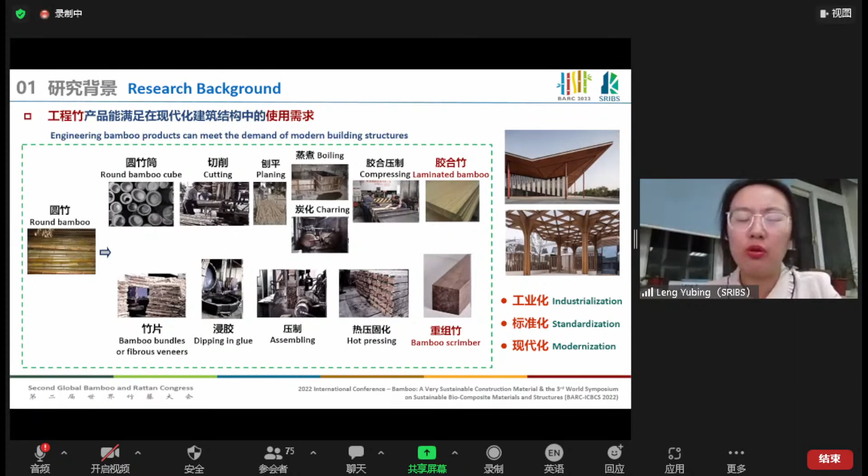Round bamboo has the longest use history around the world, not only used in small buildings and civic buildings, but also large-scale exhibition halls and pavilions. As early as the 1950s and 1960s, we started research on using round bamboo in buildings. Engineered bamboo products actually use modernized processes to produce low carbon, modernized, standardized products. So while keeping the good nature and features of bamboo species, it can also reach standardization and industrialization.

Status quo of engineered bamboos: first, we are lacking technical standards. From designing, construction, maintenance, and inspection, there are a lack of relevant standards. As a result, there are hindrances and obstacles for bamboo materials to be used in construction. You always need a feasibility study before you can largely use bamboo as a building material, so it can only be used for pilot projects, which limits the application.

Durability and fire performance are also key factors limiting the dissemination and application of bamboo materials. Against this background, we believe we need to come up with engineered bamboo standards. Only with available standards can we largely apply these to the building sector.

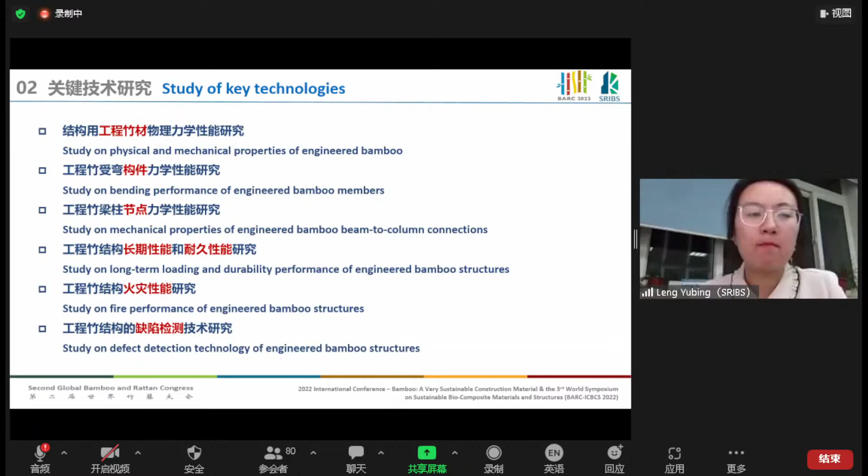So focusing on the materials and the mechanical aspects, beam to column connections, durability, fire performance, and detection technologies for defects, and so on and so forth.

First, if we are going to use engineered bamboos as a building material, we need to have a better understanding of the tension, compression, bending, and shear properties of engineered bamboos. This is the fundamental justification and basis.

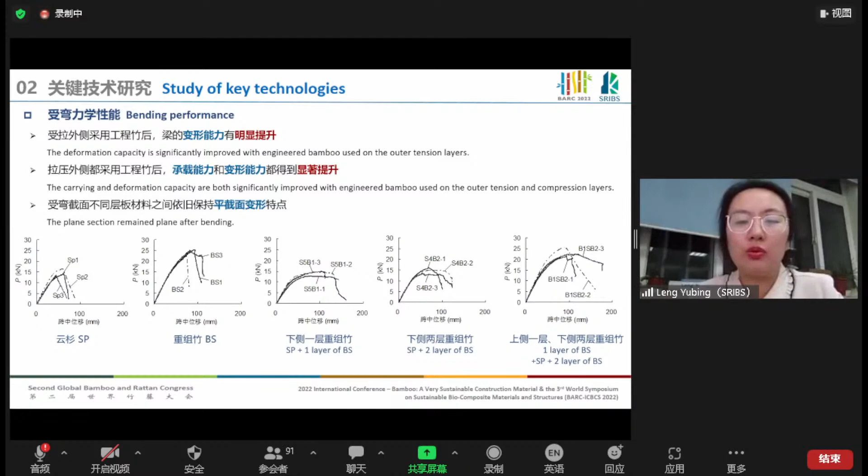We also studied the bending performance of engineered bamboo members, including specimens with a combination of fast-growing timber species in the middle, such as spruce, in the middle layer. Through this laminated and bamboo scrimber test, we found that if we use fast-growing timber species in the middle, with engineered bamboos on both sides, the deformation capability is significantly improved. Based on these testing results, we use the flexural capabilities and calculate the layered superposition, equilibrium condition, and deformation compatibility conditions, and so on.

We also study the mechanical properties of beam to column connections. We selected laminated bamboo and bamboo scrimber to understand their mechanical properties and connection methods, and to optimize the connection, we consider the mechanical features and processing method.

We selected four connection modalities. The first is bolted connections with slotted-in steel plates. This is a very simple structure, but the downside is it's not strong enough, and at the bolting connection point, it's very easy to crack, so it has a cracking problem.

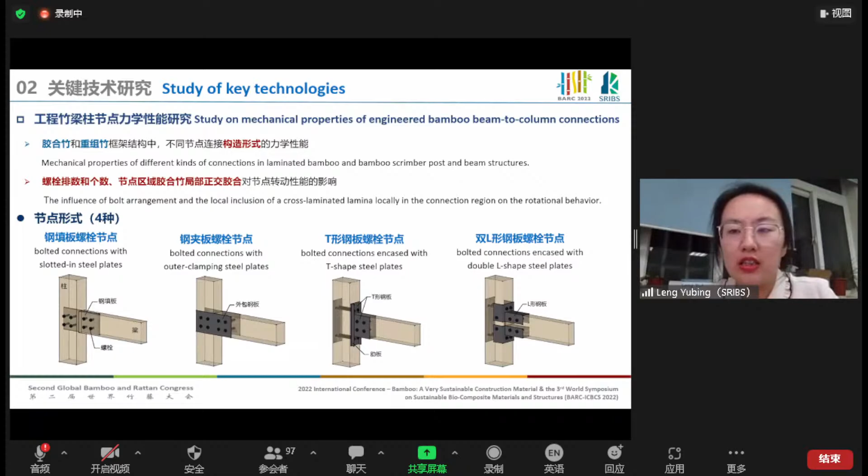In order to improve the situation, we came up with case 3 and 4. One is T-shaped steel plates, the other is double L-shaped steel plates. The latter would consume more steel, but the affordability of the cost is still very good. So we had these four types of tests.

For the mechanical feature, sometimes it's difficult to resolve the flexural loads and cracking problems, but still, with improvement, we can improve the bending performance.

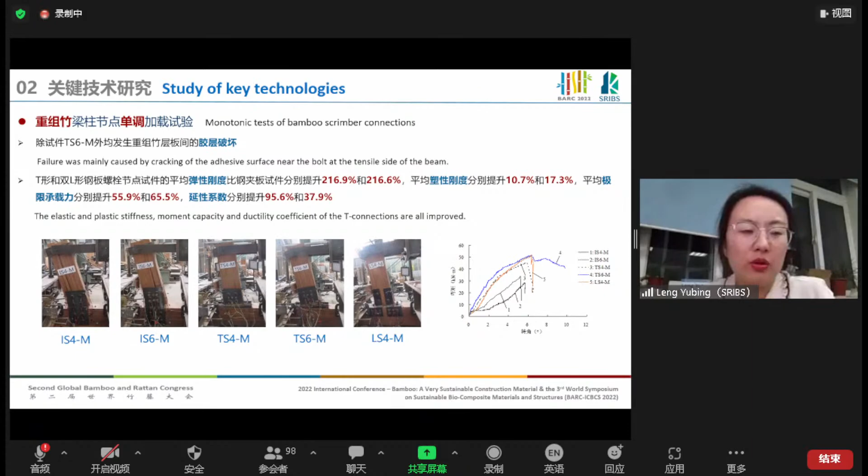We also had monotonic tests of bamboo scrimber connections. For the bamboo scrimbers, the most typical failure is at the bolt connection. Sometimes it's very easy to crack because for the laminated layers, the strength is not as good as the outside bamboo. So if we can use these T connections or L connections, then the ductility and stiffness can be improved. This is another improvement on the connections.

This one is on the durability test. The cracking and durability test is related to the aging test of engineered bamboos. We want to understand which are the sensitive factors that cause the aging problems and durability problems. We consider the UV test and also the wet and dry cycling test. For the durability test, it's time consuming; we need a longer cycling time to get a result. But since we are in the middle of preparing the standards, we have accelerated procedures.

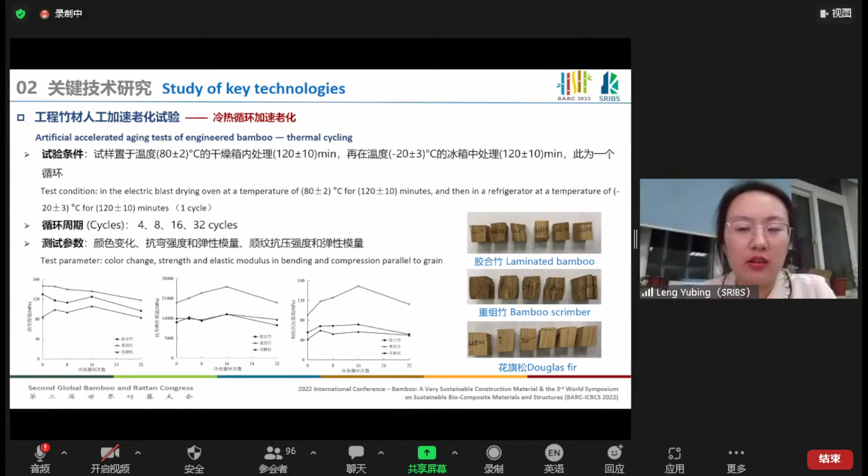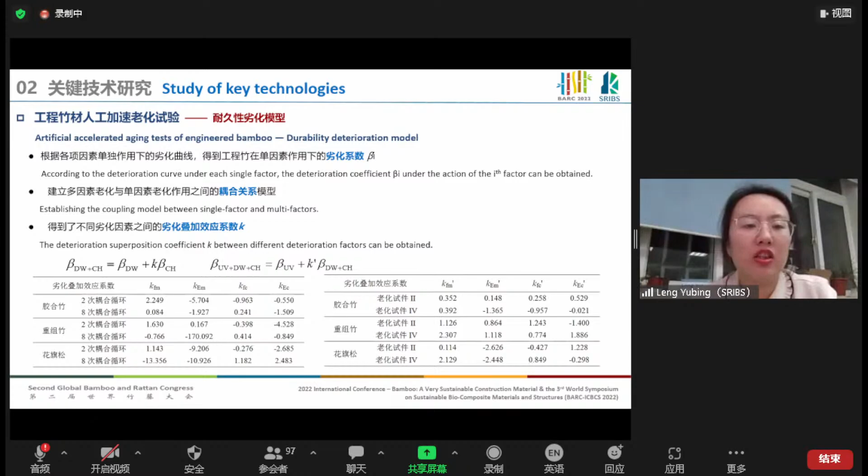In addition to the single factor test, we also conducted multi-factor tests. For the single factor test, we can get the deterioration coefficient, and with the multiple factor test, we can add the results together. Then we can tell the durability and which factor causes cracking problems more seriously, and which one is more sensitive.

So we also have some outdoor testing. Outdoor testing has the downside of being time consuming, but it's more close to reality. We put different types of bamboo outdoors, under rainy, windy, and sunny conditions, and we come back from time to time to test the durability.

So it's a very long cycle. The longest cycle is 50 years. Currently, we have collected 3 years of data. The longer the time is, the better the durability results are.

We also have some long-term loading performance tests, and like the durability test, this is again very time consuming. For the long-term loading performance, we focus on the creep test. Sometimes the loading performance is good during the short time frame, but over a longer time it could cause problems, so we made a comparison between short and long time.

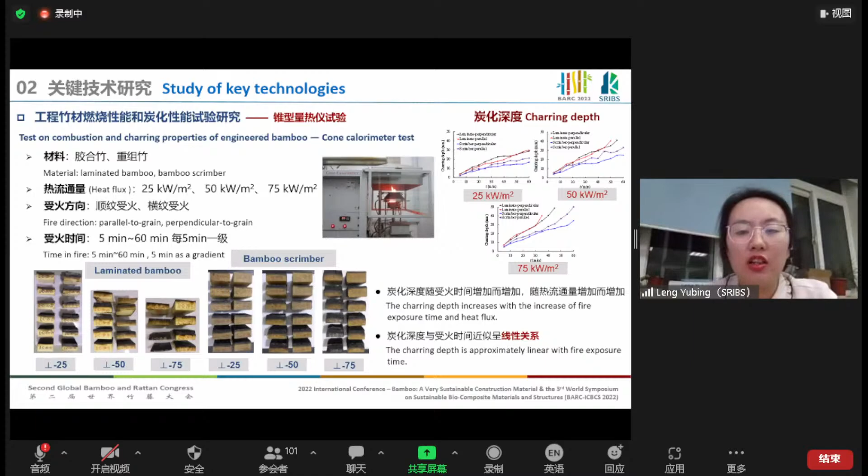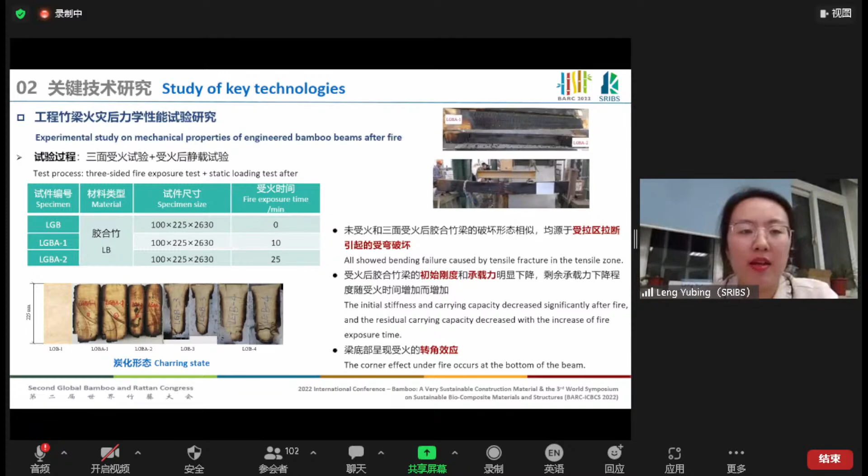Another is fire performance. We studied the charring rate, and we concluded that bamboo scrimber behaves just like hardwood in nature. We also had an experimental study on the fire-resistant extreme.

The last one is defect detection. Because after long-term use, there may be pests and other inside defects, you cannot tell from the outside appearance. Traditionally, you use naked eyes and a drilling method, but you cannot tell these inside problems. We use this drilling resistance method, so we can accurately identify the location and size of internal defects.

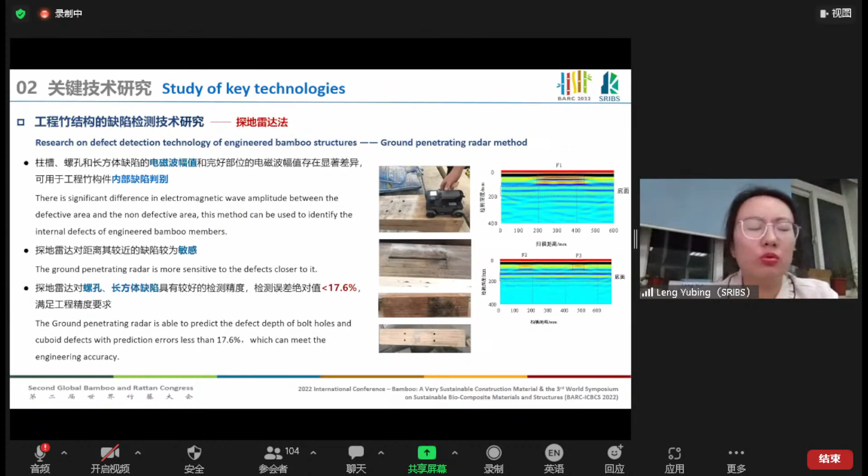We also use a ground penetrating radar method, which is a kind of electromagnetic wave amplitude method. Through this detection technique, it is very good for identifying problems in bamboo scrimber.

So next I want to move to standard preparation. Our institution has been spearheading the preparation of 3 standard documents, which were officially implemented on the 1st of November this year in China. It took us 5 years to prepare these standards, with many workshops and expert discussions.

When we tried to get opinions from experts, we got a lot of input, from 80 experts, totaling 1,000 pieces of recommendation. For each piece, we gave feedback, and based on that feedback we amended and modified the standard text. It entered into force on the 1st of November this year.

So the outline of the design specifications includes fire performance, connections, materials, and the strength of materials. People are really interested in this for engineered bamboo structures, for laminated bamboo and bamboo scrimber, including the design spec, how to select the best performing raw materials, and the fire protection design method.

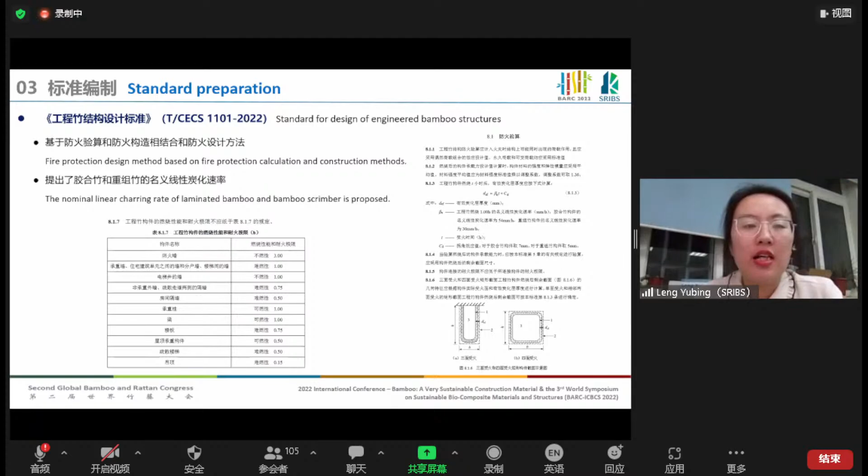We have offered a methodology outlined in this standard, and based on the data we have acquired, we have established the nominal linear charring rate for laminated bamboo and bamboo scrimber, the two materials.

This standard is for construction and quality acceptance, like the manufacturing of the modules, workplace safety, and quality acceptance. And this one is for testing materials, defects, deviations, fire protection, and ability testing.

To briefly summarize, we have done material, module, and beam-pillar connection tests, and also artificial aging tests for long-term load performance, fire protection, and durability under aging. We also worked out the methodology for non-intrusive, non-invasive defect testing, and we published 3 standards as outlined here.

So we will continue to study long-term performance, durability, and fire performance. The standards are already published, but we need to further study how to improve fire performance and durability. Secondly, there are still different types of engineered bamboo, and sometimes you can use a hybrid structure of different kinds.

Also, how to build a full industrial chain of multiple stakeholders. And for bamboo scrimber, the length and cross-section dimensions are facing a lot of limitations, which could limit its use in bamboo structures.

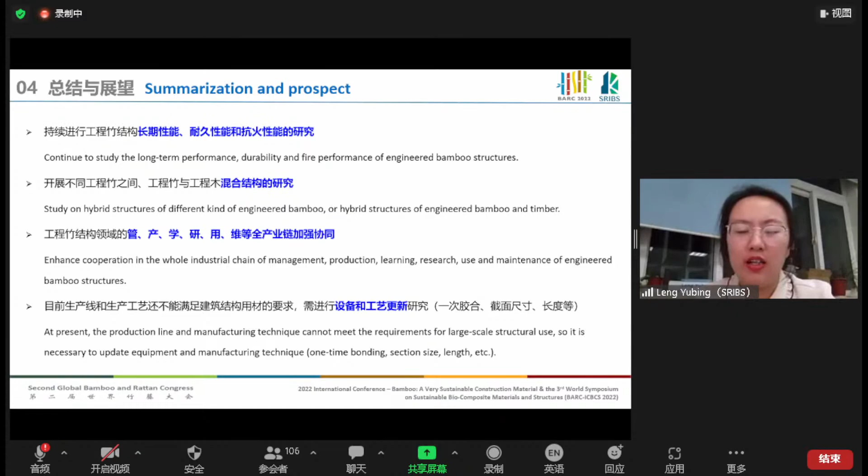We believe that once the standards are enforced, and we have more real-life applications of, for example, bamboo scrimber, the industry will definitely scale up, new processes and equipment will be invented, and bamboo scrimber can have a wider scope of application. Thank you very much, hope to talk to you later.

Thank you, Director Leng, I know it was a very systematic introduction.

You have many years of experience from the Shanghai Structural Safety Key Laboratory. You talk about the physical, mechanical processes and durability, testing, fire performance, strength performance, and long-term load performance. And also you talk about the newly released standards. Of course, in the future, we need to closely monitor the implementation of the standards and see how the engineered bamboo materials can be used on a wider scale in the construction sector. So I just want to remind all the audience coming from all corners of the world, you can write in. If you have any question, you can write a question in the chat box. And later we can ask the questions. And till the end of the day, we also have an interaction session where we can raise questions too.

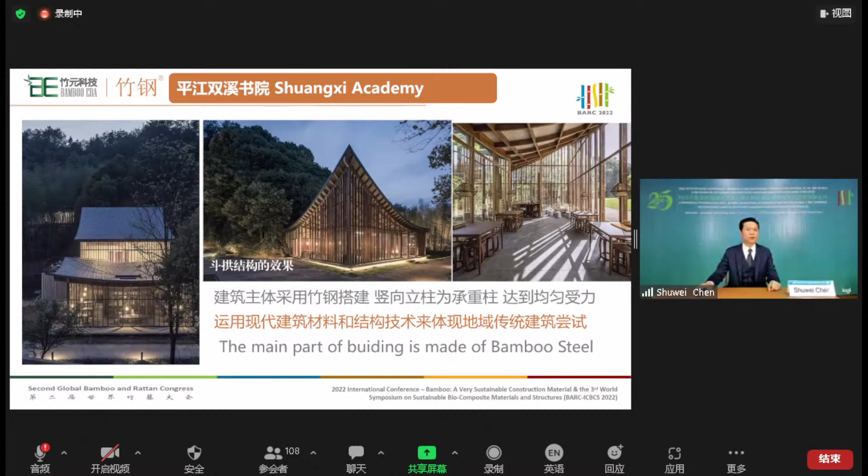So the whole roof is supported by vertical pillars, and each pillar is bearing the whole load. It is load-bearing pillars, and the beam and pillar connection points are using the interlocking structure to make it closely connected.

And also conversion projects or makeover of the Beijing city traditional courtyard houses. If you visit the small alleys of Beijing, you will see these enclosed courtyards. And we are using bamboo steel to have a makeover of these older residential courtyards. It's a perfect combination of old and new design philosophy.

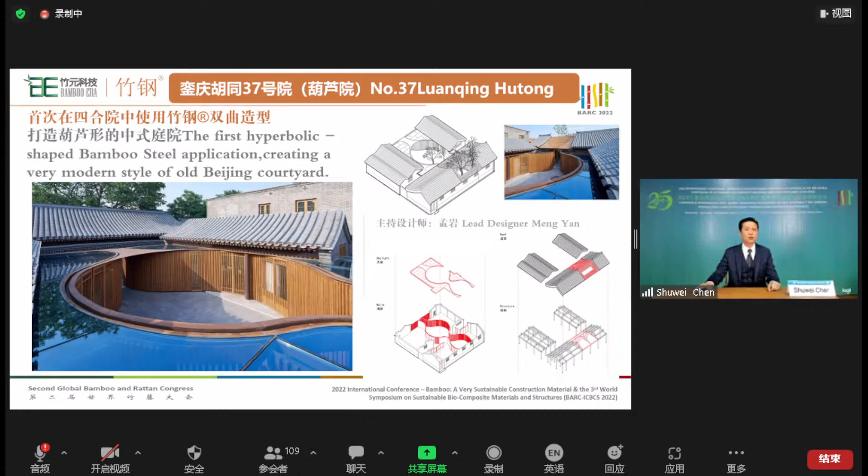And also, this is number 37, Luanqing Hutong Courtyard House. We are using the bamboo steel to make a gourd-shaped central atrium. And you can see this is another courtyard house. We are using the tall wall glass to achieve a kind of look-through effect.

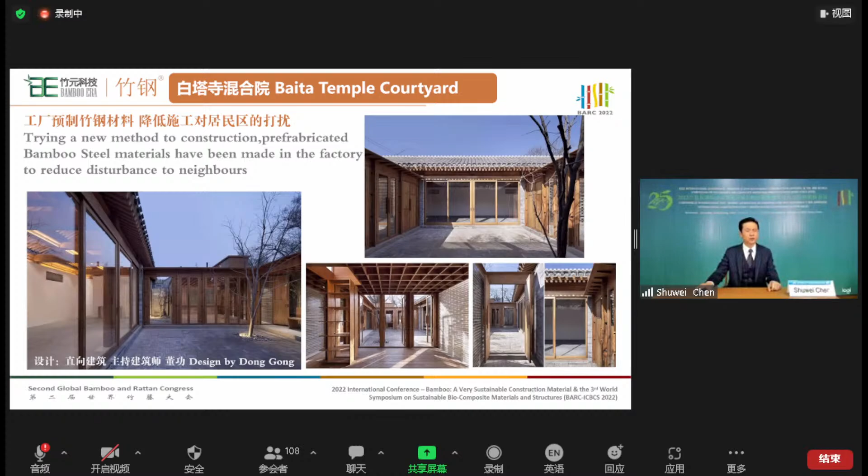We are also making this look-through effect to be fully aligned with the personality of a traditional North China courtyard house. Also, bamboo steel is a green and low carbon product.

In recent years, Chinese people give more attention to not only structure functions, but also low carbon and green features. We are committed to the green transformation of buildings to help China achieve its dual carbon targets. Bamboo can be a structure material, and we don't need a secondary interior decoration once the building is finished.

This is a Muji Hotel in Beijing. The bamboo's advantages are preferred by a lot of Japanese designers, including Kenya Hara, who designed and constructed this hotel using bamboo materials. A lot of visitors mistakenly think the hotel was using wood and timber, but actually the halls and multifunctional rooms are using bamboo materials.

This is the Nanjing Aohong Resort. You can see the project is an all-round concentrated display of bamboo steel materials, indoor and outdoor decoration, including exterior grills, outdoor gallery frames, canopies, and atrium gallery frames. It's perfectly presented in shape and details, showing the beautiful craftsmanship standards in Oriental China.

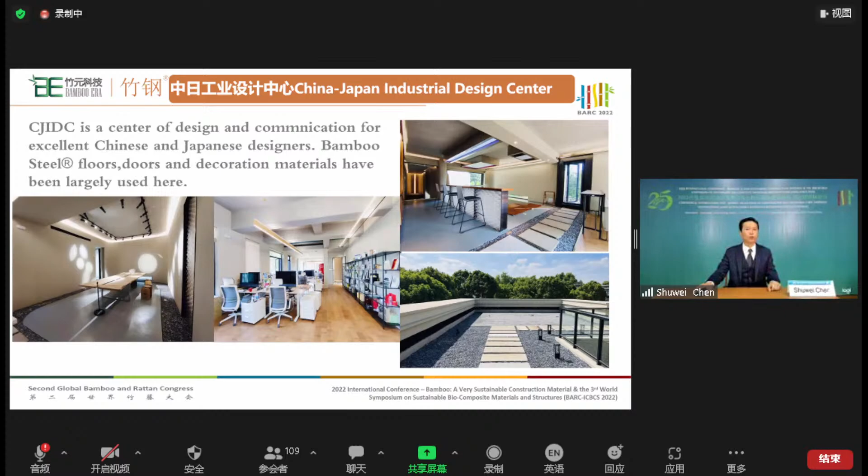It showcases that bamboo steel can be applied not only in large-scale projects, but also in small-scale household style decoration as well. Bamboo steel serves the connection between green nature and mankind.

In the ancient poems of China, there were a lot of praises about bamboo's nature. Nowadays, using one bamboo comb and pole to connect nature and mankind.

This is a bamboo steel art installation made of 20-meter long bamboo combs, providing urban citizens a fictional nature space and authentic beauty.

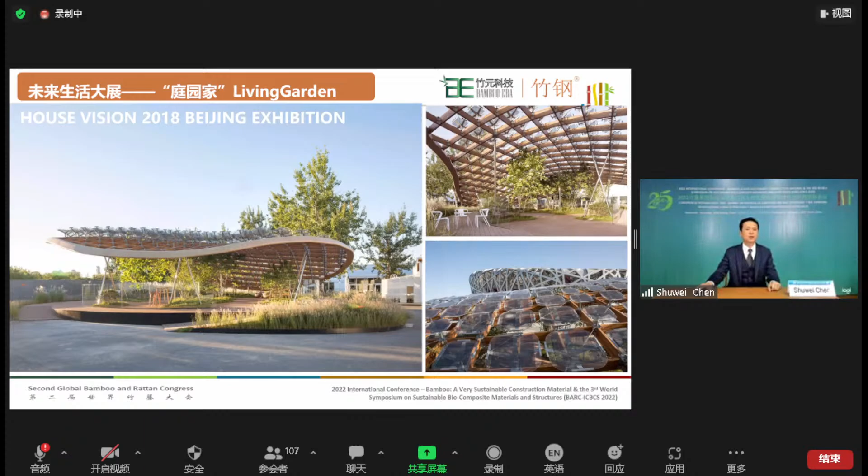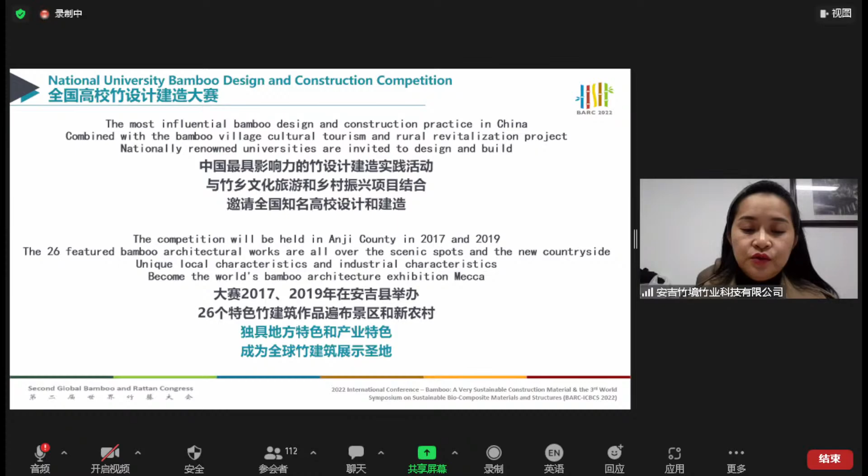We had 26 such constructions completed all over Anji County. You can see all these localities are important beautiful village areas or tourism scenery spots.

For example, Yucun village, which President Xi visited. We had 2 such exhibition projects there. Those are real pictures photographed on-site.

We also promoted the Beijing International Garden Building Festival, held in Beijing in 2018 and 2019 twice, and held in Chengdu 3 times in 2020, 2021, and 2022.

Under these festivals, we designed and built over 100 garden building works, greatly promoting Beijing and Chengdu's garden city advancement. These are pictures from the Chengdu festivals and some artistic building works.

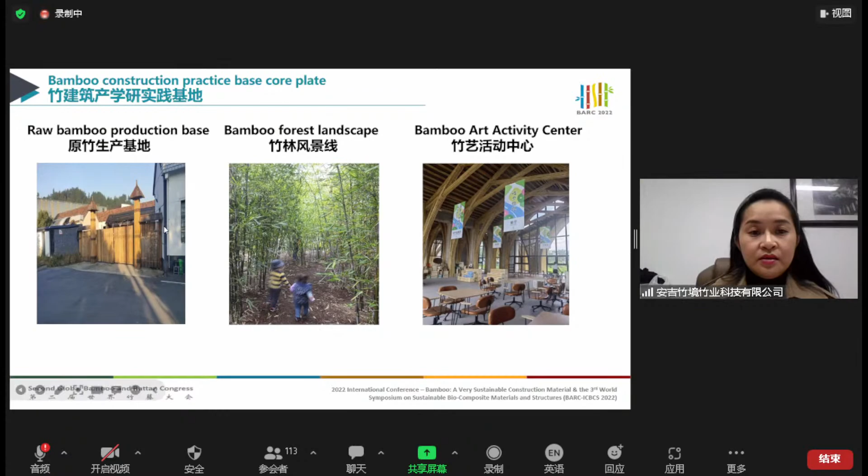Thank you, General Manager Wang, for your excellent sharing. You talked about the background of the company, the raw material, key technology, R&D, marketing, and other activities. I'm really impressed by your business model—it's quite unique, a very unique way of marketing. You're organizing national level competitions, garden demonstration projects in local communities, inviting architects and designers from design institutes and marketing academies. It is really a very smart and effective marketing campaign.

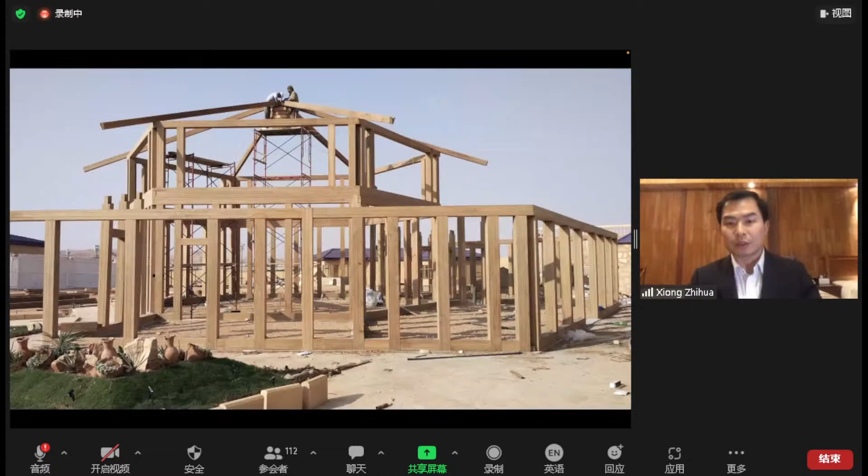This is a prefabricated modular home we installed in a foreign country. Some other structural design, just a few cases. I want to show you some interior decor products. Truly, you can use bamboo to do everything.

This is the East Campus of Shanghai Library, designed by SHL. It used 100,000 bamboo shades and shutters. It has to meet AR level fireproof level, so it's a big challenge to us too. We were able to overcome it. And every time you're challenged by a specification, after overcoming them one by one, you will be able to excel.

This is the interior of an airport. Every product has its own challenges, and most companies trained and honed their skills through challenges. This is in Amsterdam, a prefabricated modular hotel structure.

We are also using bamboo for all the windows and doors and furniture and the facades, and interior wall panels are from us. Some modular interior products of Chinese hotels, Shanghai Shangri-La main canteen, interior decor materials. And also in Hong Kong, a university, all the campus using interior wall panels.

And prefabricated furniture, customized furniture. This is interior decor of a shopping mall with curved forms, ceilings, wall panels, side panels of a department store in Hong Kong, some hand-woven, kind of handicraft, more artsy products. It got the Red Dot Design Award, second time to work with Herzog and de Meuron. This is M+ Museum in Hong Kong. All the wall panels, flooring, and furniture use bamboo.

After finishing all these projects, we knew the challenges we overcame. It's a common thing, every company is facing difficulties and problems. And a special product portfolio targeting the US market, furniture. For every market, it's like the Wild Wild West. This is something we just started, targeting a new market.

Our furniture. Some outdoor, indoor furniture, office furniture, a lot of use. It's just how to find a market, that's a challenge. And also we need to have a lot of challenges to overcome, different forms and shapes, bend the materials.

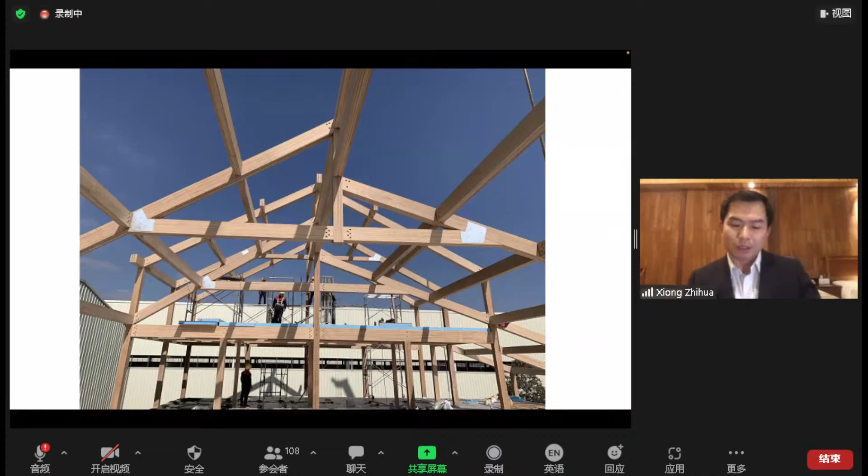When I saw all those projects, sometimes I'm impressed by myself, I feel very proud. But we always remain true to our mission. I'm only one of many entrepreneurs in this industry, just sharing ideas with you. So what is our future? Where is our future? We have done a lot of projects, but sometimes we lose sleep.

We don't know what we need to do in the future. So I try to analyze my own company. So this is the industry. I try to understand what the company will be like. So how do we find the future for the company?

Definitely bamboo will replace wood. It can also create a new market, so it can be infinite. The opportunities are infinite, because the bamboo product market is infinite, is unlimited. From the supply side, as long as we are able to supply high quality products, the market need is infinite, is unlimited.

I think it's just a huge market. The issue is that we are not able to supply enough good quality products. And also, we have been commercializing this industry for 3 decades already. In every market segment, like furniture, structural modules, in every market niche, we already have some leading companies. For example, bamboo flooring, bamboo furniture, construction materials, and bamboo utensils.

This is a 13th Five-Year certificate for the prefabricated modular raw bamboo construction methodology, the very first bamboo construction methodology featuring prefabricated modules in the whole country. This methodology was used by the China Metallurgy Construction Group. This is an innovative modular construction methodology.

We also have some connector exploded diagrams, for example the bamboo bundles at the critical connection points. We did analysis and calculation, and we are working with Chongqing University to test different parts of the components, such as structural connection sample tests, mechanical structure strength tests, and tensile strength tests. We also got national funding for this testing regime.

Next, I want to showcase some real-life projects.

We can have a raw bamboo structure, steel bamboo hybrid structures, and 3D curved surface structures. So for us, we see these three types of raw bamboo structures.

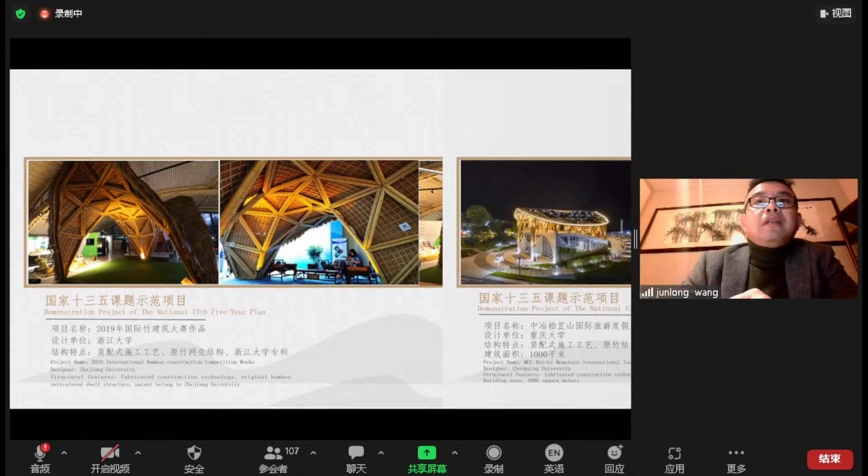This project in 2019 was a competition product of the INBAR bamboo and rattan competition of bamboo structures. This is the meshed shell structure. It took us only one day to assemble the whole installation.

I've talked about this before. The prefabricated modular methodology finished by China Metallurgy Construction Co. Limited, designed by Chongqing University. This is the first time for us in the industry to use prefabrication modules and on-site assembly. All the rooftops are made by raw bamboo, all the beams, the pillars. We got 10 patents. At the time, it was the largest raw bamboo project.

Later we did this one, the Bamboo Industry Exchange in Yibin City, International Bamboo Exchange, designed by Xi'an Architectural Design Academy. It is also prefabricated. The largest span is 80 meters, the largest span for any bamboo structure in the whole world. We are using a hybrid of bamboo and steel, a bamboo steel hybrid structure. It already got the Golden Award for innovative steel structure in China.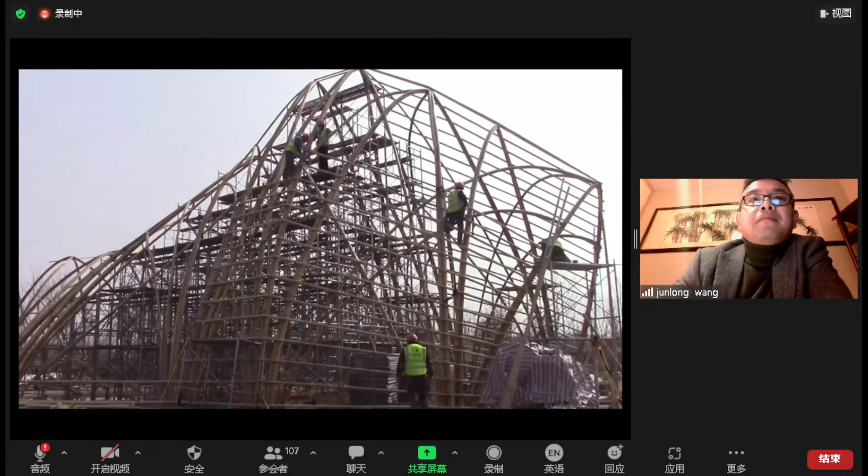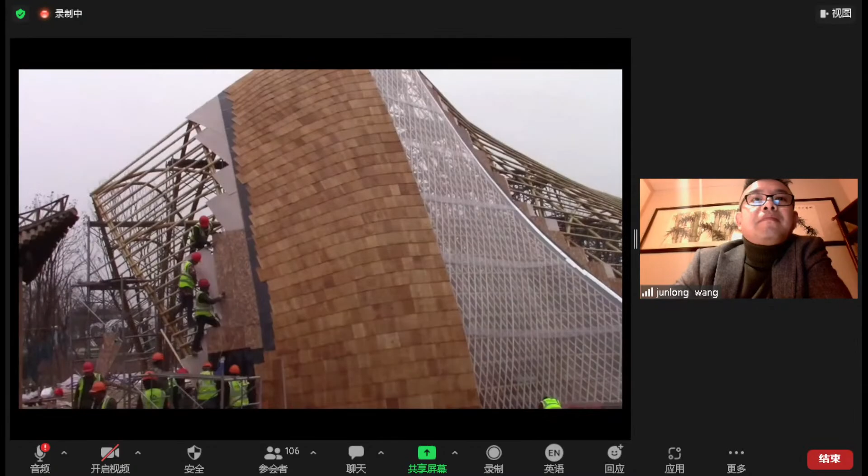I want to show you the whole assembly process - now watch the video, please. After the project is constructed, we will report it on Central Television of China.

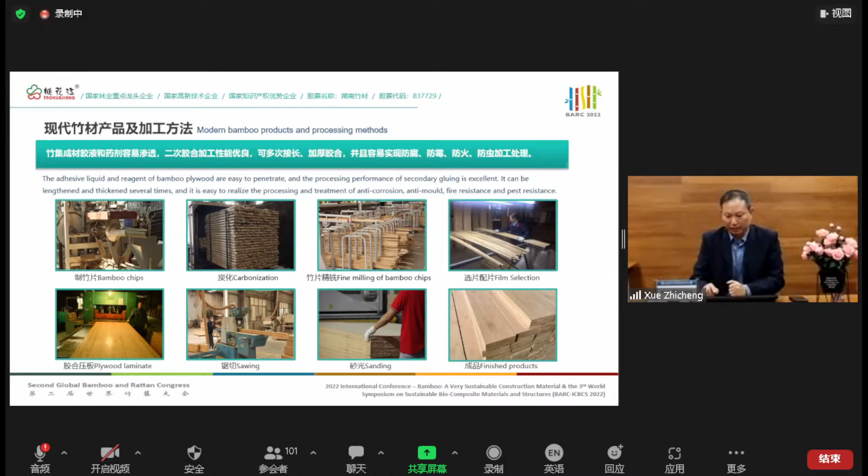For all the above-mentioned 4 types of products, we had some in-depth analysis. We noticed the adhesive liquid and reagent of bamboo plywood are easy to penetrate, so it's easier for secondary processing, meaning we can lengthen and thicken it multiple times. It also has very good properties after treatment for anti-corrosion, anti-mold, fire resistance, and pest resistance.

Next, I want to share some research on bamboo building structural materials, including laminated bamboo. Comparing the 4 types of products, we believe structural laminated bamboo timber is the best for wide application because it has the advantage of outdoor weather resistance. It can be further lengthened and thickened to any size. It also has excellent performance for anti-corrosion and anti-mildew. Of course, bamboo scrimber is also very good with regard to strength, weather resistance, anti-corrosion, and anti-mold.

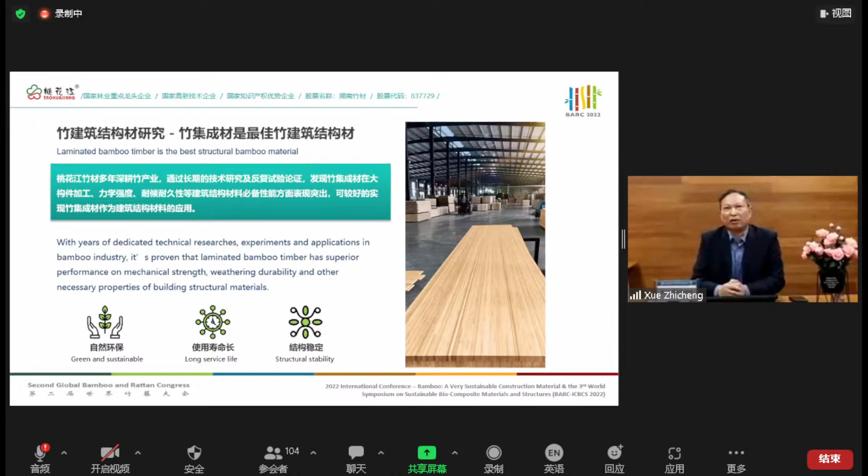Because it can be used for outdoor and also indoor decoration, this is our conclusion: laminated bamboo timber is the best structural bamboo material.

We carried out a series of studies on structural bamboo laminated timber. We made comparisons between bamboo and timber with regard to flexural strength, compressive strength with a smooth grain, flexural modulus, outdoor weather resistance, size requirements, anti-corrosion, anti-mold, and fire prevention.

It can actually replace structural timber products, performing better than structural timbers. I've listed the numbers in a table - I cannot go through all the details, but I want to stress that you can use certain technical processing methods to achieve level 1 anti-corrosion and BS1 D0 difficult-to-combust fire prevention level.

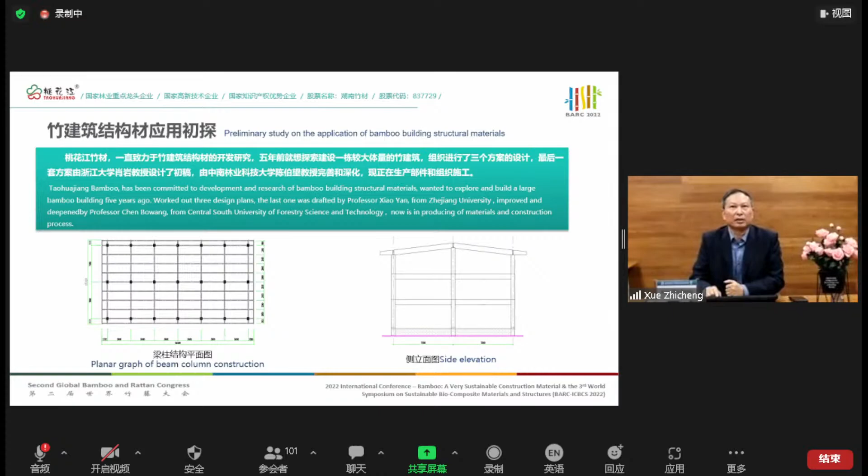So we have 3 stories in the building. It's going to be our R&D center and laboratory in the future. All the bamboo columns are 400 by 500 millimeters in dimension, 10.6 to 11.5 meters high. The structural beams are 240 by 600 by 7,300 millimeters. We will have a glass curtain with outdoor bamboo decoration for the external wall. The main construction will finish by the end of this year.

Some preliminary study on the use of bamboo building. Bamboo is similar to wood, but different from wood. They have different properties and features. Bamboo and wood can be used in the same field. I think nowadays bamboo can cover every area of timber use, but the way we use them should be different.

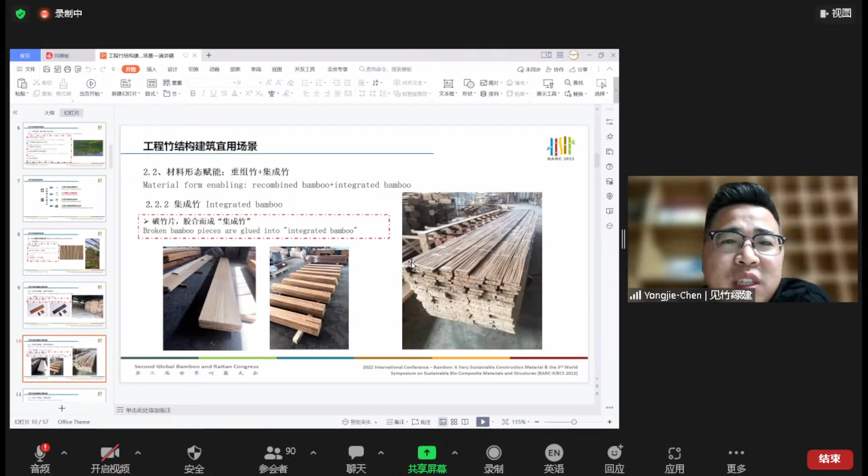For laminated integrated bamboo, each company has their own processes and glues, but there are some differences among companies. On material size, the longest length we can reach is 48 meters, and we can have customized production.

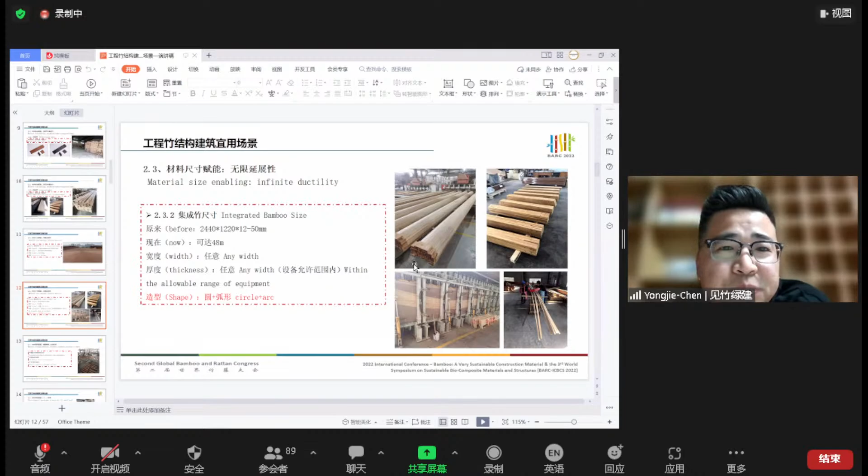Including the shape, the arc shape, and the round shape, we've had a lot of successful engineering projects. Also, material strength can be varied according to the client's desires, so we can produce customized products.

First and foremost, we can improve bamboo material's own properties, and then we can combine bamboo with steel and other materials. But it's not just a simple combination, it requires a lot of sophisticated technologies.

Because we are engaged in the construction and building sector, we are not just sellers of raw materials. Only if your products are very mature and safe can you promote them in the market, otherwise there are a lot of safety risks.

Next, I would move to mildew persistence and anti-mildew, anti-mold treatment. We have some common treatment methods like physical means and chemical means. We use a vacuum pressurized method, not the surface coating method.

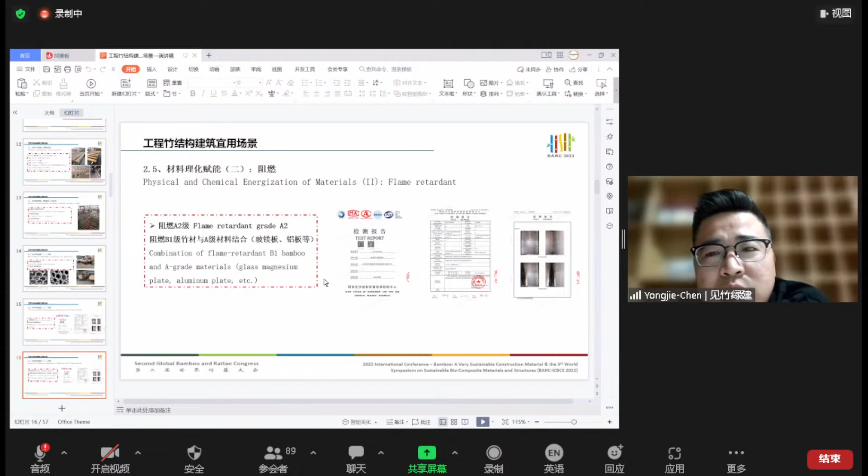Flame retardant: we had already resolved these fire hazard problems a long time ago. We can combine these with a glass magnesium plate and aluminum plate. We have a very advanced and mature technology.

For fire endurance, we already exceed the national requirement, reaching 3 hours. And also for the fire resistance limit of the composite floor, we can reach 2 hours, also exceeding the national requirements.

The third part I want to talk about is suitable applications of bamboo structures. We have 10 years of engineered bamboo application experience, and I will show you what are the suitable scenarios for our engineered bamboos. The first is it's very suitable for structural devices.

Because it is the bamboo structure, I want to warn and alert everybody that I've seen a lot of companies engaged in timber structure go bankrupt. I don't want to see our bamboo structural companies also go bankrupt. As I said, I want to reiterate, we are not just sellers of bamboo raw materials. We need to do more processing and treatments.

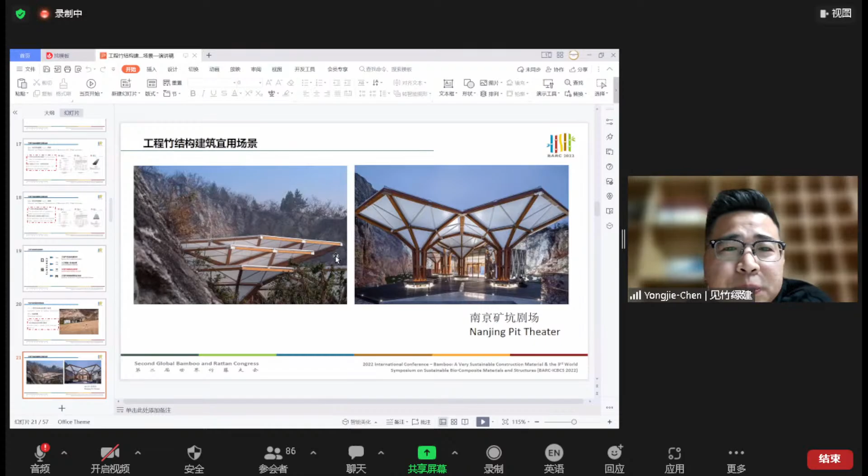This is the Nanjing Pit Theater. It's an umbrella-shaped theater, and we won a lot of prizes and awards for that.

Standing beneath those structures, it is also suitable for indoor use. It is a kind of both a structure and also an interior decoration.

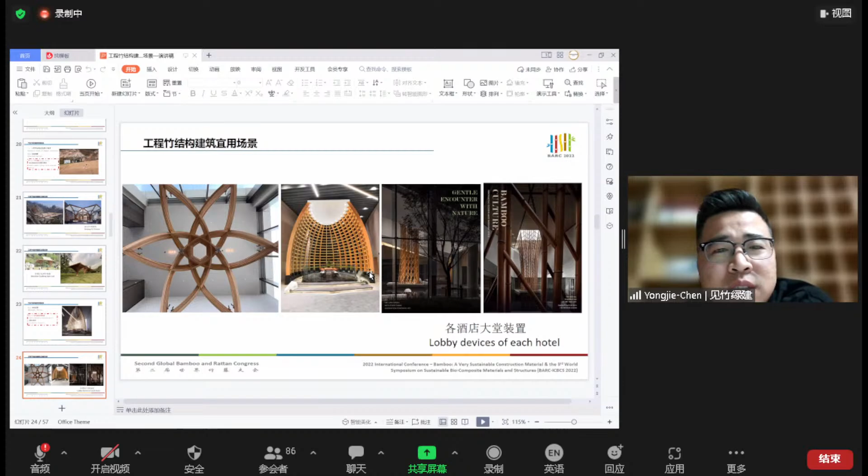The second application scenario is for rural building renovation. We have one advantage compared to timber companies: bamboo manufacturers were originally involved in flooring production and bamboo wall production, so we already have production lines very suitable for engaging in rural revitalization projects.

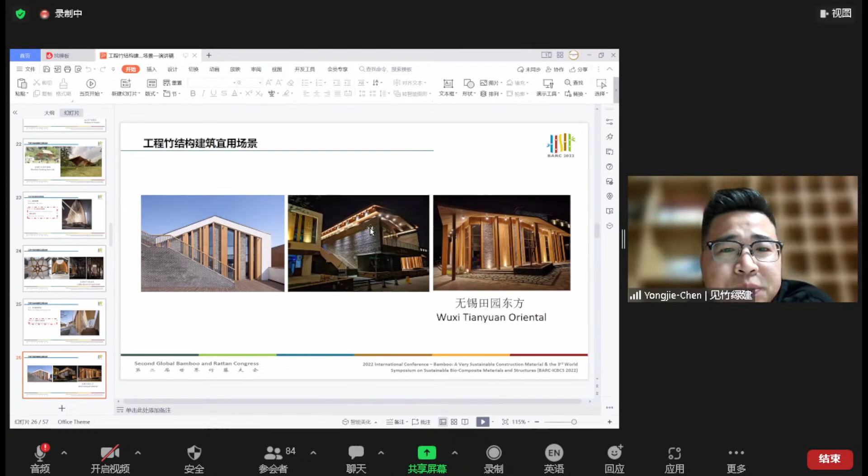This is in Wuxi. We've been involved in outdoor construction, interior decoration, and retrofitting renovation projects. This is another project, like an Airbnb project in Tonglu, Zhejiang province. We gave them very warm colors.

This is the historical museum for the New Fourth Army. It took us 35 days to complete this project because we were in a hurry — President Xi was planning to visit the place. So, 35 days of around-the-clock construction.

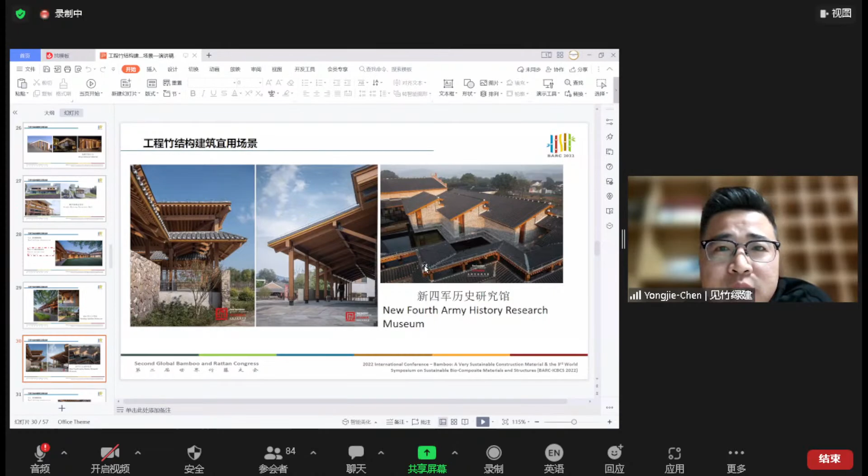You can see the structure here. We combine the rural construction shape with a modernized gallery and corridor, adding warm colors. In the meantime, we also embedded new elements, combining bamboo with steel.

Again, I want to reiterate, we are not just pure sellers of bamboo materials. We are the architects and designers. So this one is the combination of bamboo and steel.

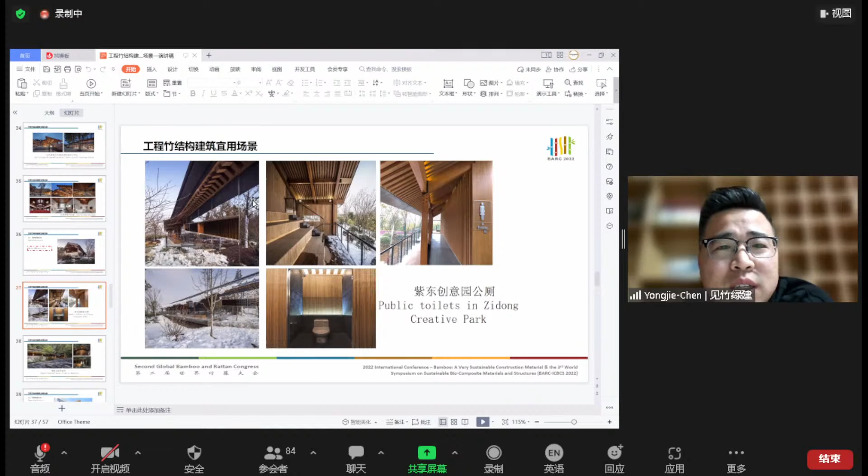This is the toilet. We had a lot of experience in toilet construction compared to theater construction — we are more experienced. This was a tourist site combined with a library and reading room.

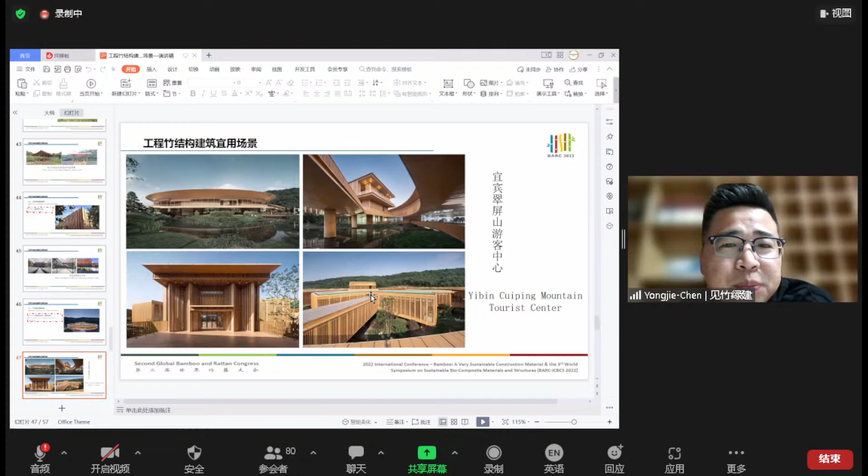It's a very typical and successful project even nowadays, thanks to good design from our architect, but also our implementation is quite good.

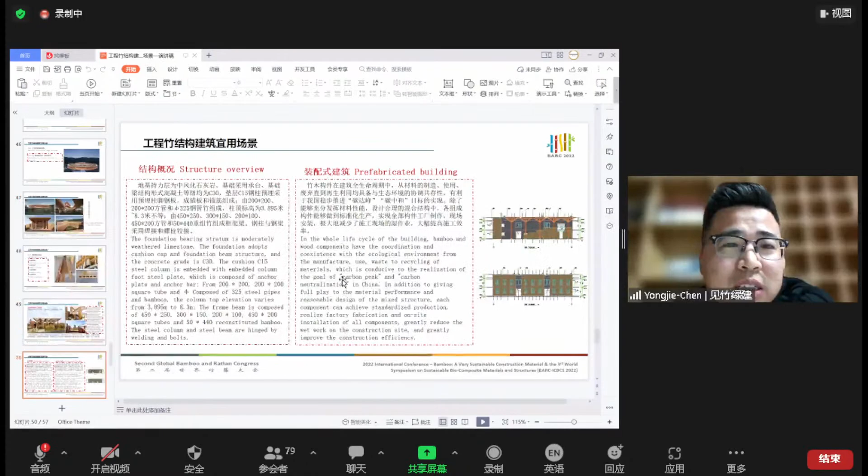I want to talk about the prospects or future of bamboo structures, because a lot of peer companies, scholars and experts were talking about the promising futures of bamboo structures. However, I just want to cool you down with some bottlenecks of this bamboo structure.

We are lacking expertise and experts in this regard. We are lacking architects and designers. There are some majors in universities and colleges. We do have some R&D capabilities, but we need more such talents.

Second, we are lacking standards - design standards, check and acceptance standards. The first speaker talked about newly released standards. Our company followed very closely the drafting of these standards. You said November 1st was the implementation date of the standards. It took me a month trying to find such standards available from the market. I didn't find any.

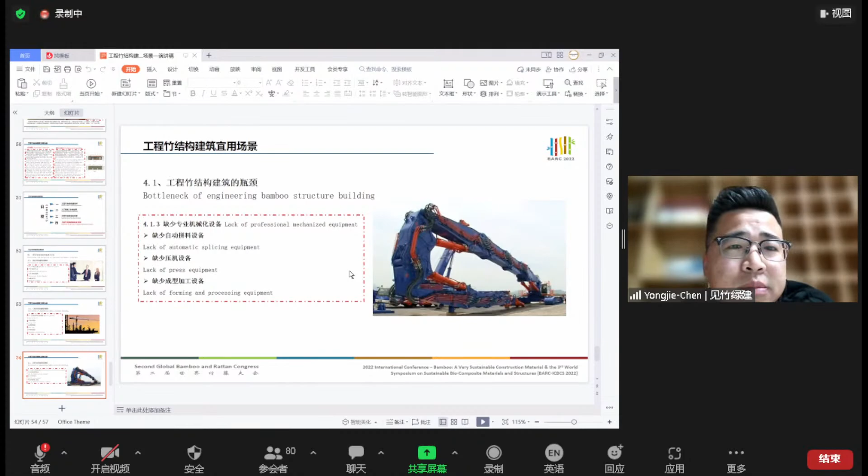Another thing is machines are very expensive, and the machine must suit the need of our products, like compression or assembly. All these products, the machines were actually invented and developed for wood, because the fiber strength and density of the material are quite different from timber and wood. So you can't really copy and paste the machine to make bamboo products.

And the future of engineered bamboo - I think we have a great market prospect. I've been in this industry for 14 years. I previously felt that this market is so small, I can't really stay here forever.

I wanted to change business. We have just 100 businessmen, but none of them are really big companies. They're not really making 100, 200 million yuan per year. They're not making a lot of money. So for young people like me, we are very ambitious. We want to have a greater market, and not many people are like me.

I feel that we are in the real economy, right? Bamboo has a great value. It has a great prospect. Working with bamboo is meaningful. So there are many things we need to do and we can do.

My company wants to be a very professional company. By the Spring Festival, we will have our own design institute. We can have more in-depth design. We want to be the architectural design firm with steel, wooden structure and bamboo structure. And also we have a professional construction company which has a national license for construction.